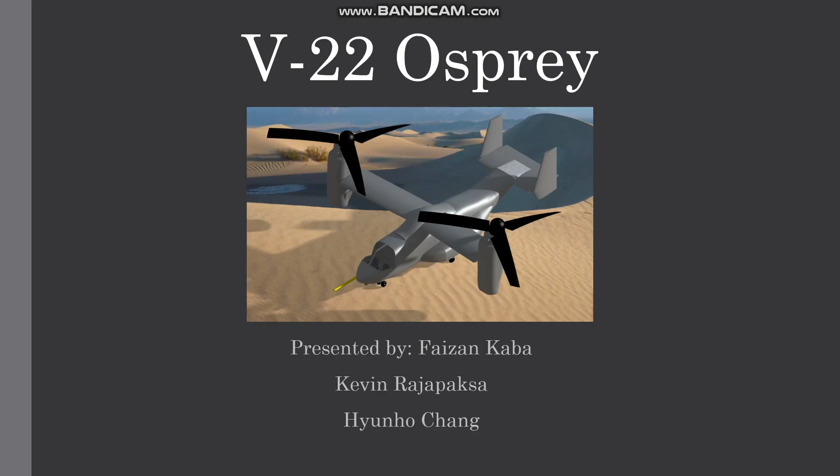Hello everyone, this is CKR, Group 5. We are presenting the V-22 Osprey in our project. It's presented by myself, Faizan Kaba, Kevin Rajapaksa, and Hyunho Chang. Let's get started.

So this is our assembled model, and in order from 1 through 17, I'm going to go through who made each part. So parts 1 through 3, the refueling probe, the night vision dome, and the landing gear were all made by Kevin. The fuselage and the side skirt fuselage were made by myself and Hyunho Chang. The landing gear was also made by Kevin. Hyunho and I split the engine also.

I made the blade. The propeller hub was also made by myself. Joystick was made by Hyunho. The seat was made by Hyunho. The wing was made by Hyunho. The wing box and tail wing box were made by myself. The door was made by Hyunho. And the vertical and horizontal tail was made by Kevin.

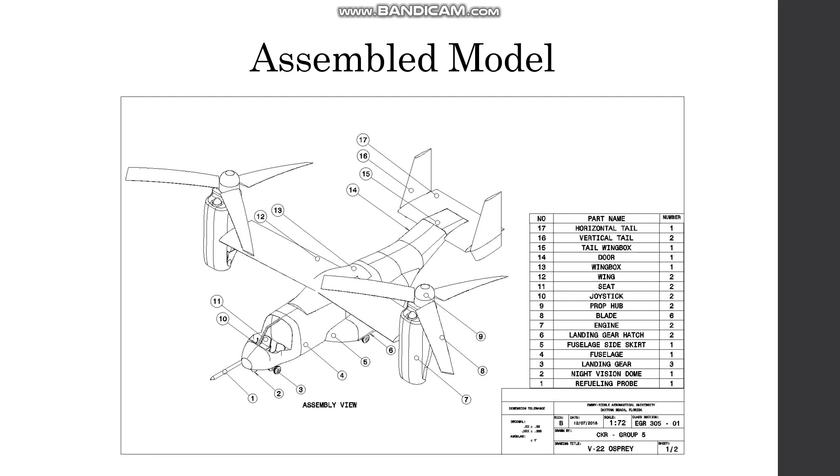This is the exploded model of our aircraft. An explanation of why some of us worked in teams is that the fuselage and the skirt and the nacelle were especially complicated parts that one individual themselves could not do. So me and Hyunho decided to take the task upon ourselves to split the work in half, where two minds could work better than one.

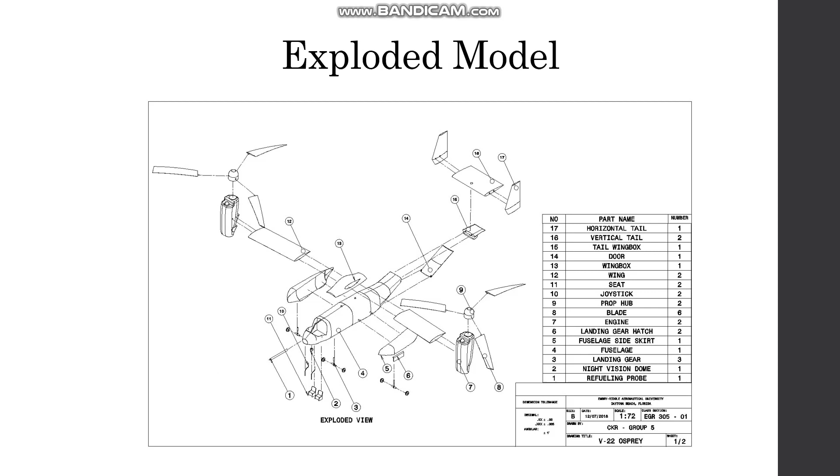I made the fuselage section, and the fuselage has to be a streamlined and symmetric body. The fuselage acts as a connection point to all major parts such as the wing and horizontal tail, and it has to have space for the cockpit and for carrying payloads, and its material is 43% composite material. Faizan and I created this model using CATIA, using GSD, by drawing the fuselage cross-section and using the multi-section command.

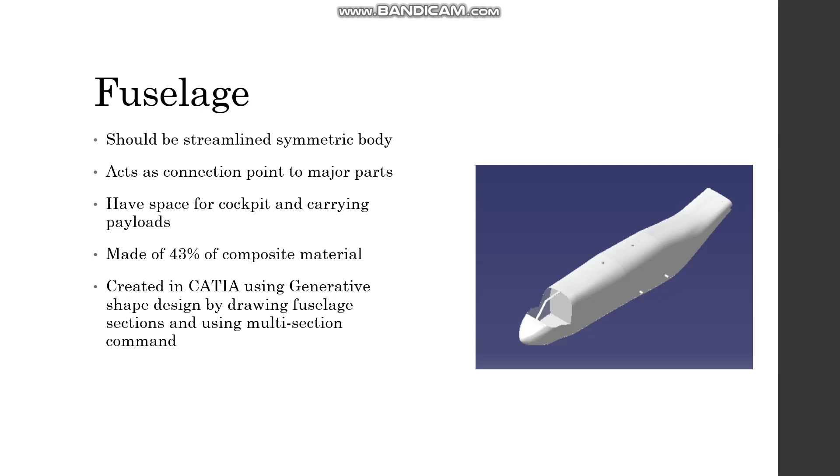This is the Osprey wing. It's the major component that makes the lift for the Osprey. Its wingspan is about 46 feet and its sweep is about 7 degrees. I used a NACA airfoil, which is 643-415. It connects to the fuselage and holds the engine at the tip. I also used GSD in CATIA, importing the airfoil shape into CATIA and using multi-section to get its shape. After that, I parameterized it to modify its shape for design iteration.

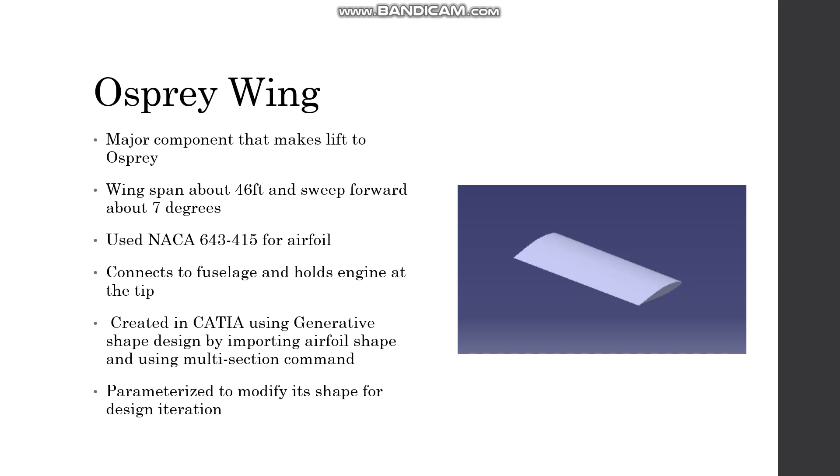Alright, I am Faizan Kaba. The next two parts were made by me. The first part is the propeller blades. The Osprey features 6 very large blades, as is iconic with the Osprey. I used a NACA 2412, which isn't the right airfoil, but since that information could not be found, I used a cambered airfoil, as is common with helicopter blades. A heavy twist is applied because the outside portion of the blade spins much faster than the interior portion, which makes a non-linear lift distribution. So this twist is added to make the lift distribution more linear.

A hefty rod extrudes from the blade at the root to connect to the hub, which will be shown next. This is created in CATIA by importing airfoil points, using spline to create the airfoil itself, then using the multi-section surface command to create the surface, and then rotational commands to make the twist in the blade.

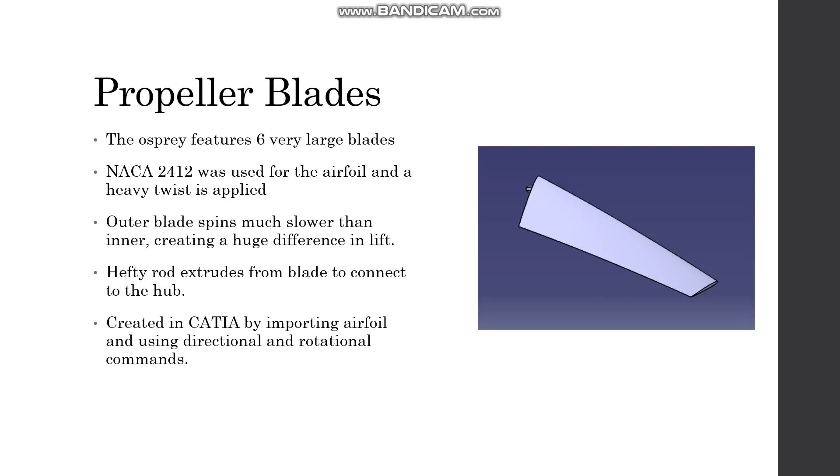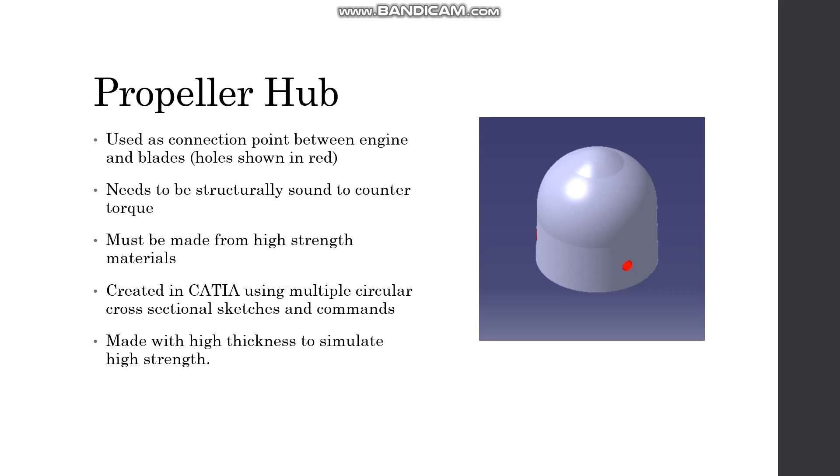The next part is the propeller hub. This is a connection point between the engine, or the engine mock-up in this case, and the blades, and the holes where the rod from the previous slide inserts into the prop hub are shown in red. The prop hub needs to be incredibly structurally sound to counter the immense torque made by both the engine and the blades. So of course this must be made from a high-strength material, and it was created in CATIA using multiple circular cross-sections and the multi-section surface command to make the surface. This part was made with a high thickness, more so than the rest of the aircraft, to simulate its high strength to counter the torques by the blades and the engine.

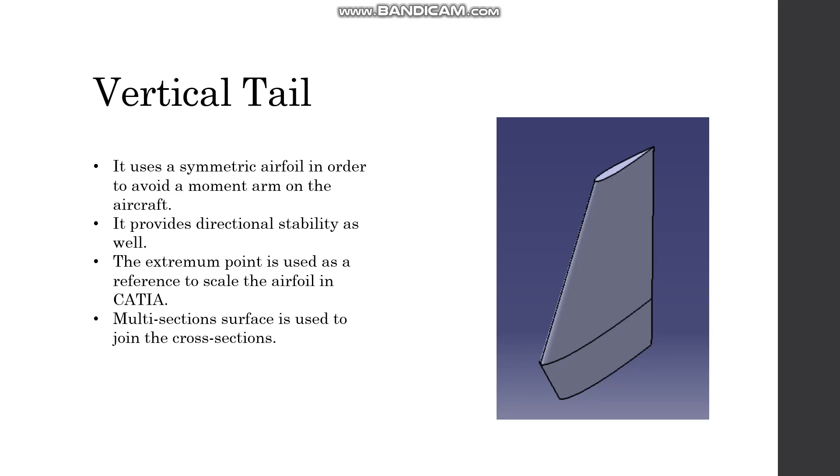Hi, I'm Kevin Rajapaksa, and I'm in charge of making the next two parts. For the vertical tail, I used a symmetric airfoil, more specifically the NACA 0012 airfoil. I used this kind of airfoil because I needed to avoid creating a moment arm about the aircraft. In addition, it also provides directional stability. I imported these points from a website, then created the other two cross sections using the translate tool, and then used the multi-section surface to connect all these points.

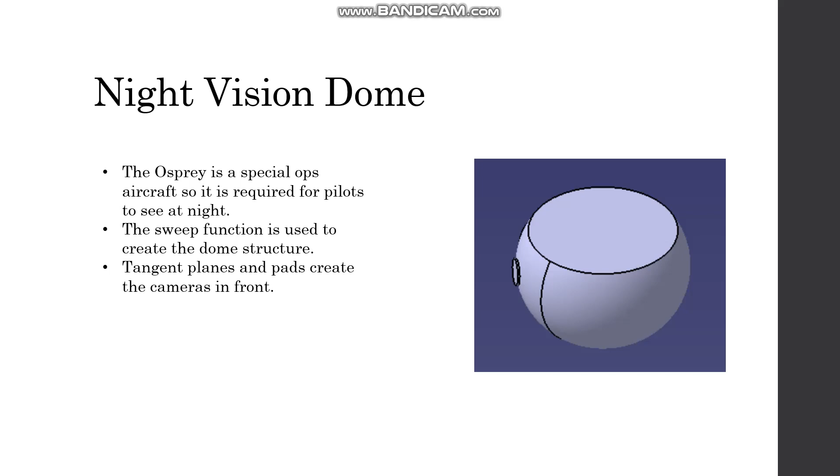For the night vision dome, I used a cross-section circle, and then I created the dome-like structure using the sweep tool. The Osprey is a special ops aircraft, so it requires pilots to see at night, which is why I created this part.

To conclude this presentation, I'm going to specify the limitations. First of all, the Osprey is a special mission aircraft, so we cannot obtain direct measurements from the internet, so we do not have any measurements. To counter that, we used the Sketcher workbench. We imported some pictures from the internet, and then we used the Sketcher to draw over them.

Also, the interior details were not included because creating the seats would be too complicated. When we were doing the assembly design, the connections were not going into the surface very well, so we compensated for that by creating cylindrical rods in the surfaces, and then we used coincidence and contact constraints to assemble the whole aircraft.